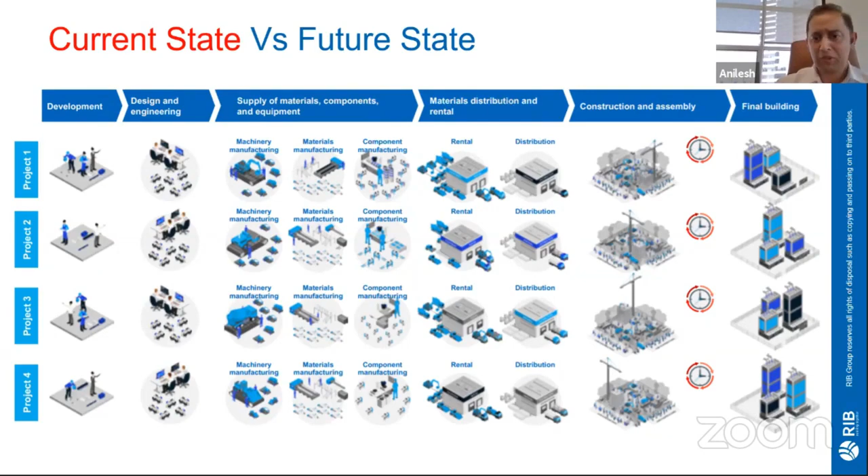Now, if you look at the last slide, you'll see that the role of technology across this value chain is split across different departments, different silos, different players. So to drive collaboration between them is difficult, and to gather and structure data is a difficult process.

Going forward, this will become easier. There will be more systems that come into play, starting from BIM, where we'll start seeing the use of 5D BIM, where developers, contractors, or other players in the industry can visualize BIM beyond 3D. It would go towards integrating BIM with time and cost, letting you visualize your project virtually before it goes into physical construction. You would see a lot more coordination at a supplier level through digital channels, whether it's online supplier portals, automated manufacturing systems used by suppliers for manufacturing products, and connecting to logistics players to really deliver to the construction site.

So again, a lot of technology coming into play in the supply chain. At the site, we would see a lot of efficiency drivers in the form of wearables and mobile applications that can control activity on site and ensure we're delivering value on construction activity. And eventually, the buildings will also be absorbing a lot of technology in terms of IoT sensors and predictive maintenance capabilities. So really, a large play of technology across the value chain.

And this is the shift that we see happening. This shift is not going to happen today, it will happen over the next 5 or 10 years. But that shift has already started, and COVID has been an accelerator for sure.

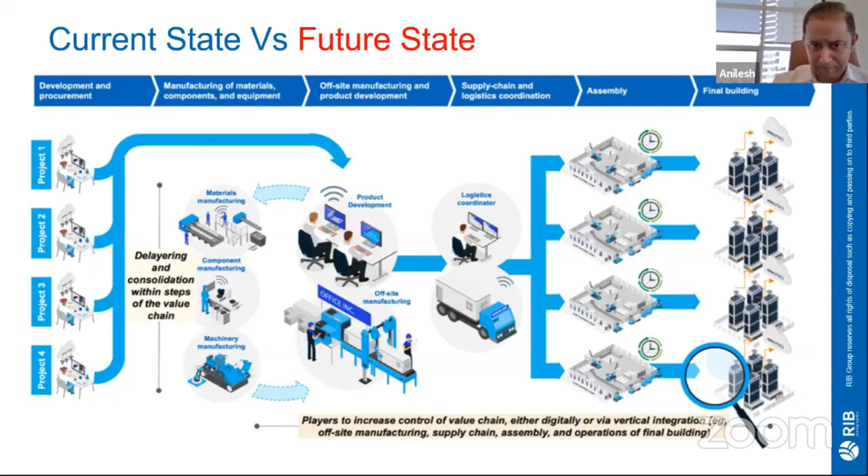So the 3 key drivers for business transformation in the construction industry, from our perspective, are data. Data is central to what we see as the journey for any company to move from a project-based approach to a product-based approach. And what we need to think as construction organizations is whether we have that plan, and an approach towards getting structured data that can help us in this journey of moving from a project-based business to a product-based business.

Do we have structured data, or a path towards structured data, to really understand how we bid and how we execute? How do we control our supply chain? How do we manage our human resources? And how do we understand our customers better? So the data strategy of any construction company is going to become increasingly relevant and important over time.

So Andrew, over to you.

Yep, thanks, Anilesh. Thank you everybody for attending today, really do appreciate it. Look, I've been privileged enough to actually be working with businesses around the globe in digital transformation or business transformation, not just in digital capacity. And it's very common when we're talking to people and trying to delve in and understand what organizations are trying to achieve, that they all have very succinct and common problems that they're trying to solve. And all of those problems stem back to data, which is why the integration of BIM, the integration of structured data and a single source database that actually applies and recognizes this becomes so important for us.

But it really comes down to the underlying problems that we see in the industry and what an integrated platform will allow you to achieve, or an integrated approach, which is it really will start to give us that true visibility into our projects and into our businesses. So we always will have the ability to go in and check the current operation of any enterprise intuitively and intelligently, and ensure that we trust the data that's in place.

It also allows us to start doing things around measuring the business performance and profitability, because we will always be able to actually break down and understand systemic problems right down to a root cause issue, and then look at how we resolve those throughout process improvement and changes to our installation or manufacturing processes.

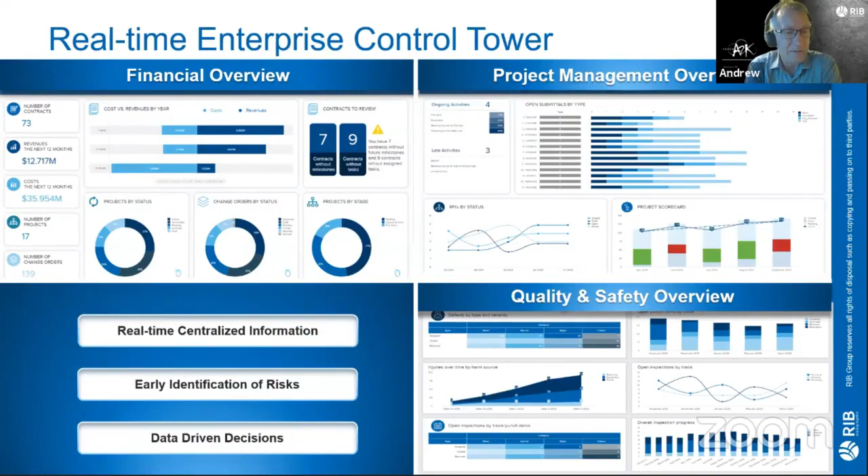This links into our financial perspective, where we can have a look at an enterprise view of all projects, delving in to understand how each individual project is performing, looking at cost variance on planned versus actual, and really going in to look at where we've had forced delays or forced increases in expenditure, so we can delve into the root cause of those issues.

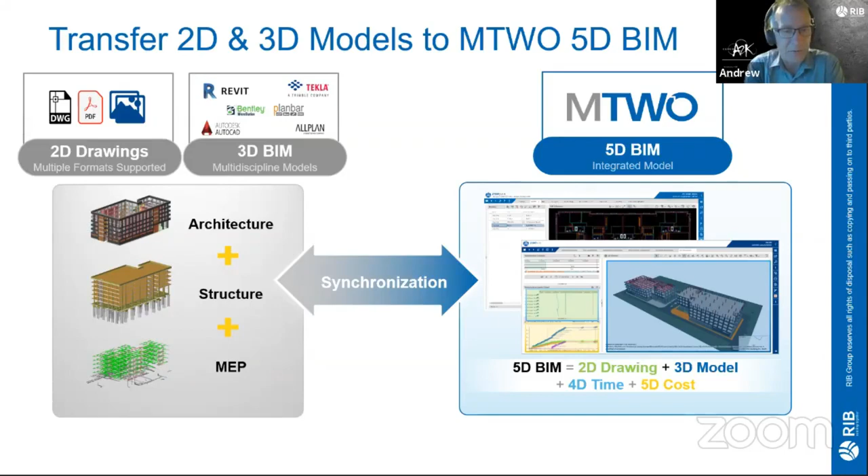One of the things we've been able to do is really tie these all together so that we can be building our schedule requirements of planned versus actual, have multiple schedule simulations running, and actually understand what our planned versus actual state is in terms of construction moving forward, but also in terms of time.

We can break this down to any particular day, week, or cycle, so we can always have a very clear and concise understanding of how our model is going together, what stage we're at, what's being built, how it fits into a milestone or progress payment, and really understand this from a 5D point of view so that we get improved project outcomes. We're reducing risks on our projects, and really enhancing and planning our construction processes efficiently and effectively.

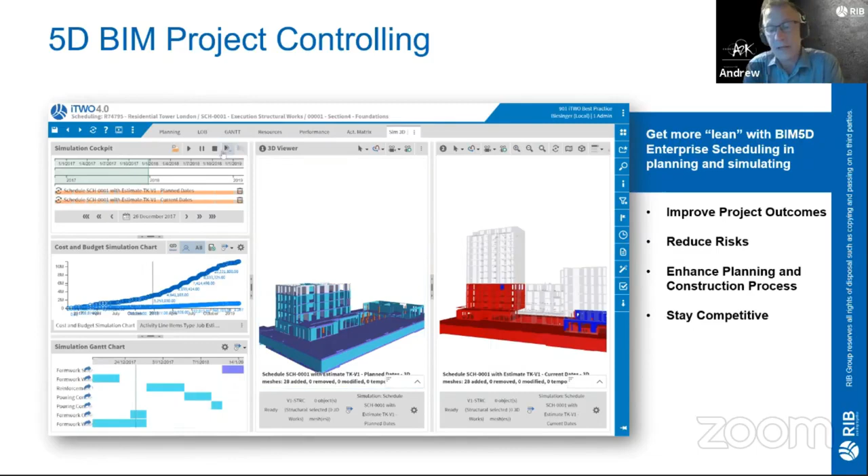This is really just about connecting all of the teams and empowering them by data, making sure people have access to the data that's important to them. Not everybody needs access to all data throughout a project, but what we do is go through role by role, understand what data they need access to, what workflows and approvals they need to go through, and then build a system based on data access, data availability, and workflows around approvals and access rights for those individuals or groups within an organization.

That comes back into building an enterprise knowledge database where we understand our codes, our code compliance, our catalogs and what catalogs we're working with, any templates we're dealing with around BOQs or schedules or structures, any calculation rules on any of our rate books, really building up that enterprise knowledge database that can then link into all of the projects we're working with as an organization.

In finishing up, as we said, the future is moving into business intelligence and AI. Part of AI isn't just around the algorithms and the data we're using, but how we access and start to use data more effectively. One of the key things we've been working on is our MTWO interface, which is really a chatbot that enables people to be hands-free on site. It means we can be talking into our smartphone or device, talking to our computer, and it will actually answer questions for us based on the way we respond, and then the algorithms that run in the background.

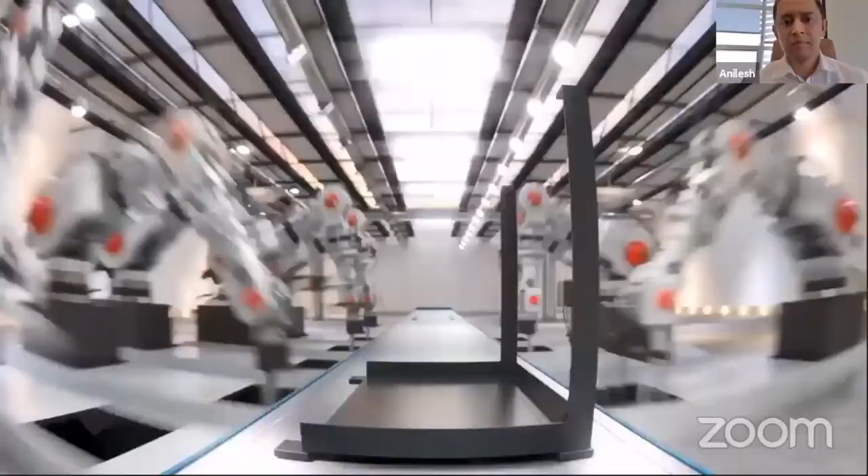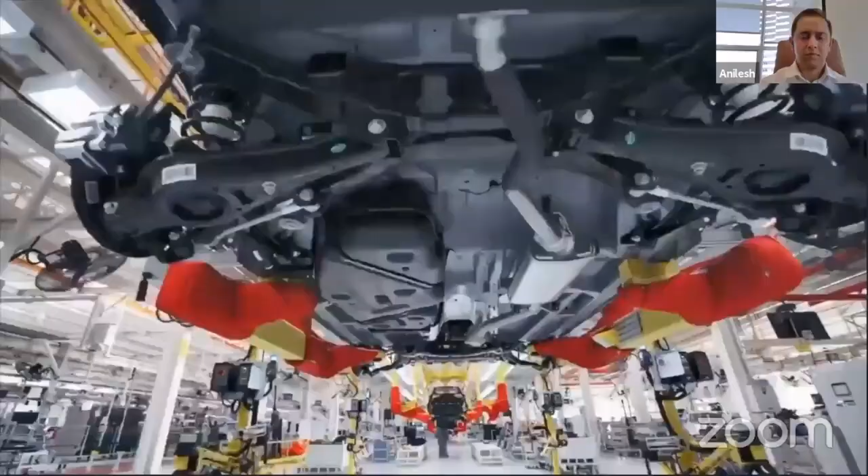The stories of innovative technologies disrupting traditional industries is well known. From transportation to banking, cutting-edge digital solutions like fintech, insurtech, health tech, retail tech, and more are adopted everywhere for digital transformation. As other industries have seen productivity levels shoot up over the past two decades, the building and construction industries have been slow to embrace transformative technologies. The consequence is productivity in this sector is still mostly flat.

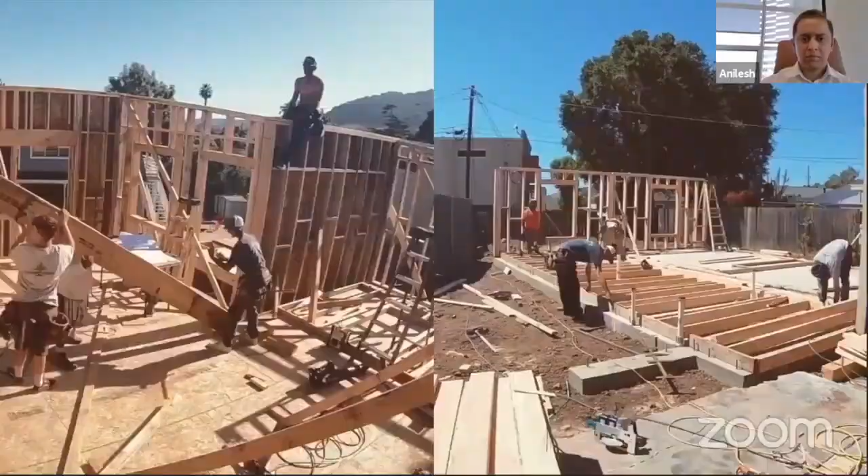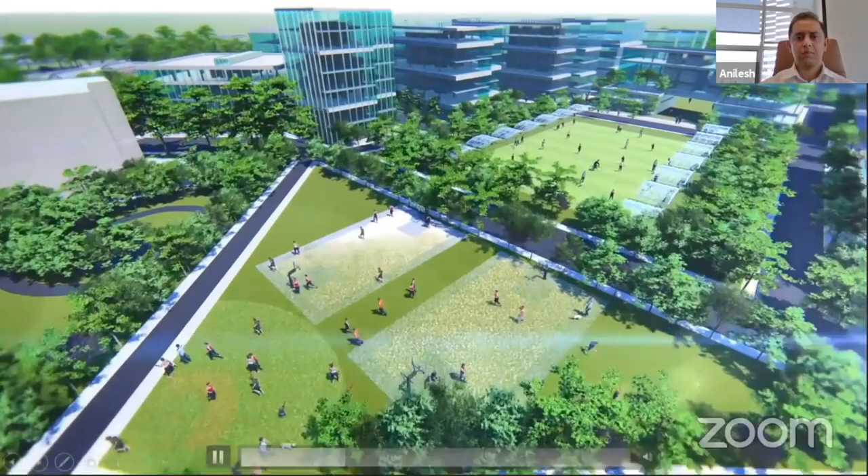While the construction industry makes up 13% of the world's GDP, with over 12 trillion USD output, which is the biggest industry sector in the world, the question is, how much waste and inefficiency cost can be saved? How can this gigantic industry be greener and more sustainable for the Earth's climate?

There is no alternative to digitization. PropTech and Contech are the only gateway to transform the building and construction industry. RIB, with its cutting-edge iTWO technology, is the leading digital innovator of Contech and PropTech, providing a fusion of advanced technologies in an integrated cloud platform, MTWO.

To differentiate the levels of digital transformation from primitive starting level with 2D CAD drawing, to 3D BIM model to carry more detail of information, and to the most advanced platform technology that empowers stakeholders to manage the full lifecycle of the project, MTWO is the world's number one vertical cloud platform for the building and construction industry.

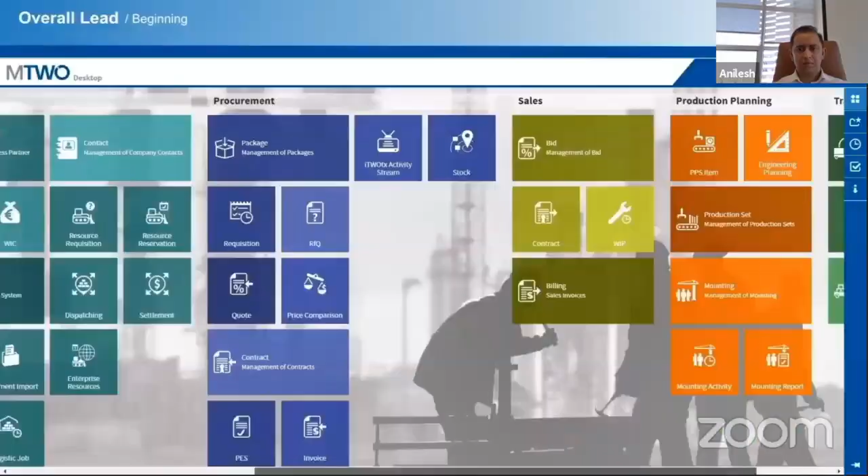MTWO allows identification of potential constructability through its unique virtual into physical process, to virtually simulate the performance of the building process. As a data source, twinning the virtual model with the physical building helps significantly in decision-making during every phase of the whole lifespan of the building, increases collaboration, and reduces inefficiencies.

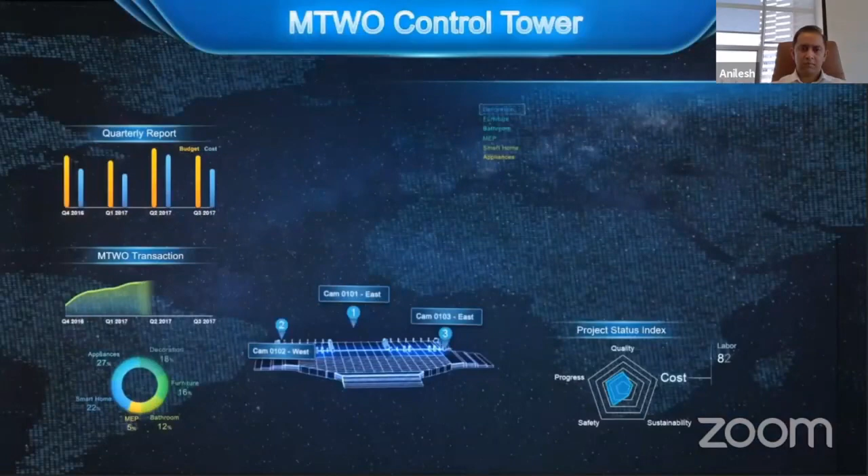MTWO is combined with Internet of Things and artificial intelligence. The boundaries between work phases of the build process are disappearing. In such a landscape of interconnectedness, digitalization in the build process enables improved predictability and reduces project risks by putting the data at the center.

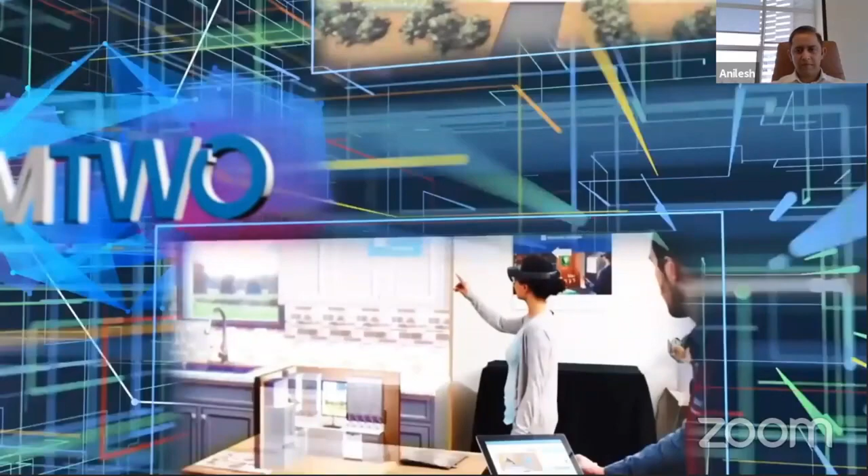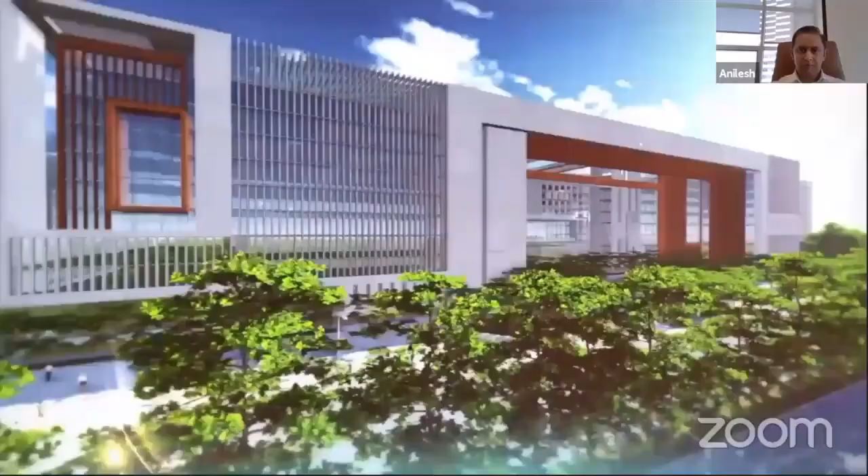MTWO platform results in a more efficient use of data resources, more effective communication and collaboration within all stakeholders, leading to a leaner enterprise management. Digital transformation is all about finding new ways to do more with less. RIB, as the leading innovator of Contech and PropTech, transforms the building and construction industry into the most advanced industry. Running together, we build the future for the next generation.

Just before we jump into questions, I want to quickly introduce the concept of how we engage with construction organizations or real estate companies. We typically try to work on a virtual lab, which basically involves deep discussions around your processes.

We take your data, we simulate your data in the platform, and we work through two days of workshops where we really provide a hands-on experience and a deep insight into how collaboration can be delivered through the platform. An end outcome also is that we together build a digital transformation roadmap with your organization, and if things work well, then we move forward from there.